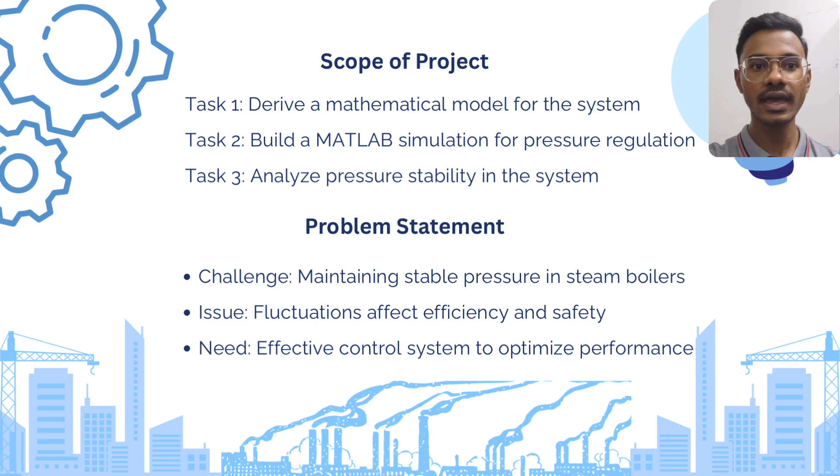Today, I would like to talk about the literature review. Introduction. Industrial process control refers to the management and regulation of equipment, systems, and operations to maintain desired output levels while ensuring consistent quality, safety, and efficiency. It plays a critical role across a wide range of industries, including paper manufacturing, food production, energy, biotechnology, chemical processing, pharmaceuticals, water and wastewater treatment, oil and gas, as well as the beverage industry.

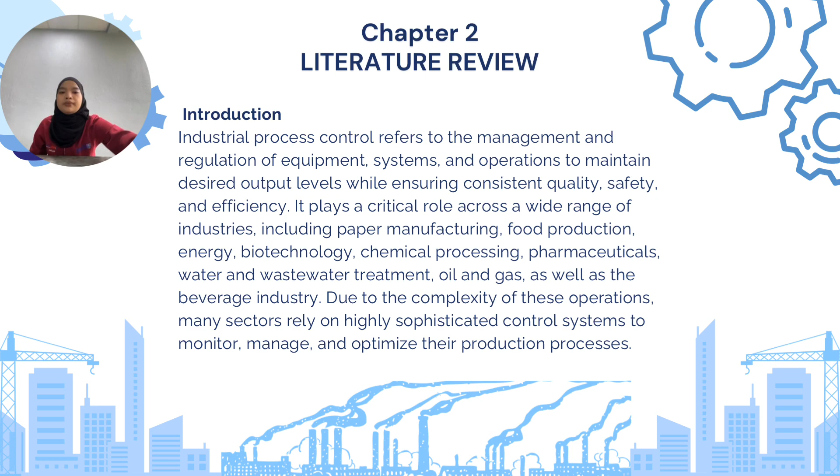Due to the complexity of these operations, many sectors rely on highly sophisticated control systems to monitor, manage, and optimize their production process. Next are the components of an industrial process control system. First, controllers. A PID controller adjusts the signal based on error. PLCs are rugged industrial computers for automation. DCS distributes control across plant subsystems. Two, actuators. Valves control the flow of liquid and gas. Motors and drives control torque, speed, and position.

Sensors and transmitters: temperature, RTDs, thermocouples; pressure, manometers, transducers; flow meters; level, ultrasonic, radar, capacitive. Human machine interface, HMI: real-time data, system status, and alerts for operators.

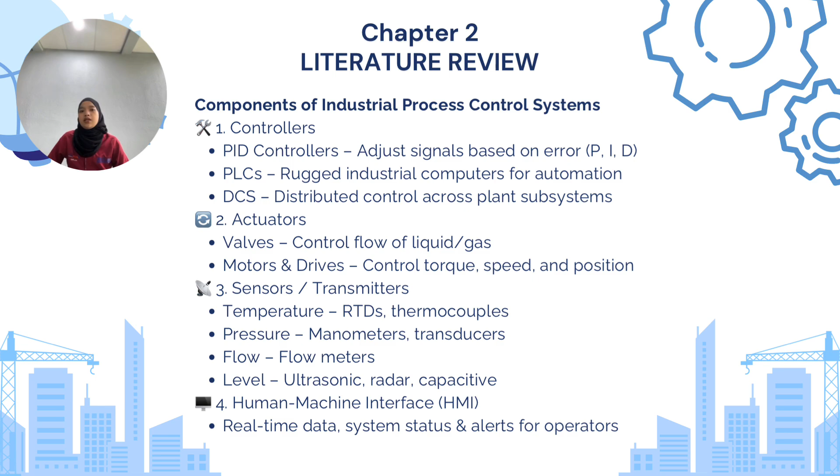Consistency and quality: maintains key variables, uniform product quality, critical in food and pharma. Safety: prevents overheating, overpressure and hazards. 3. Efficiency and cost saving: less waste, better energy use, lower cost. 4. Regulatory compliance: meets standards for safety and environment. 5. Scalability and flexibility: easy upgrades to production lines, real-time monitoring and data analytics, supports predictive maintenance and early fault detection. Thank you.

And then for the Nyquist diagram with PID, we get the shape of the Nyquist diagram with PID. So the shape is like a heart. This is some of our examples using MATLAB.

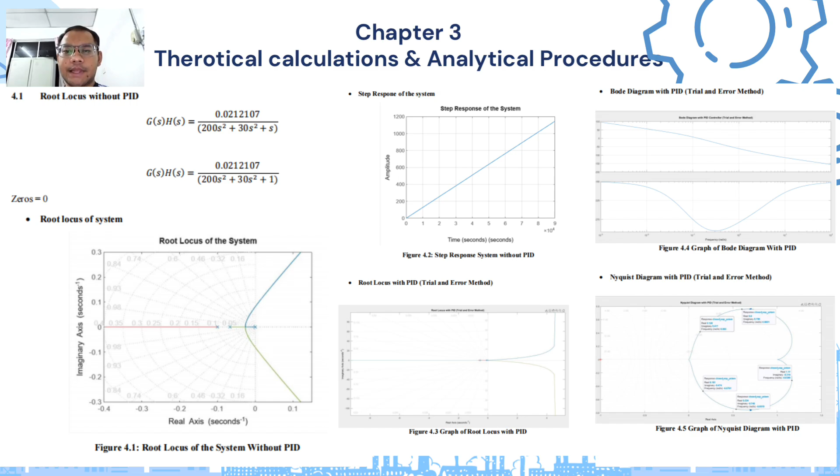Next, the second figure shows the step response without PID, with PID, and some of the trial and error methods that we used in MATLAB. For figure 4.6, step response with PID, you can see that there is a very up and down curve, and then for 4.7, step response without PID, the graph is slightly straight from the bottom to the top. And then for figure 4.8, step response with P, there is a curve from the bottom to the top.

And then for figure 4.9, you can see from the start it is a straight line. Then at the end of the graph, we can see a big trend from up to down. And then for figure 4.10, step response with PD, we get a graph similar to 4.8, which is the curve from the bottom to the top.

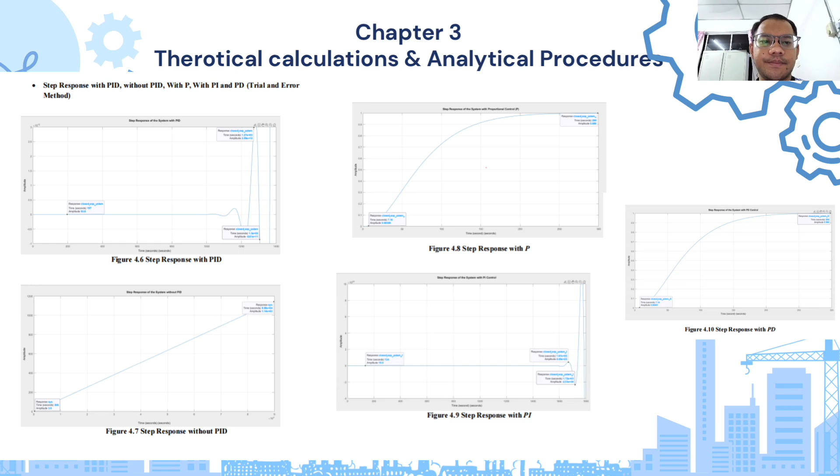So based on the theoretical and analytical procedure, we can make a discussion for our topic: this study shows how control strategy affects system performance. Without a PID controller, the system is slow and unresponsive. The rise time is around 3200 seconds and the settling time is 5800 seconds. This is too slow for most applications.

Compared to the open loop system, a PID controller significantly improved performance. Rise time dropped to 6.5 seconds and settling time to 48.2 seconds. The controller balances speed and stability. There is some overshoot, which is 18.7%, but the overall system performance is much better. Individual controllers P, PI, and PD have different advantages and disadvantages. The proportional controller is faster, with a 3.0 second rise time, but has an 88% overshoot.

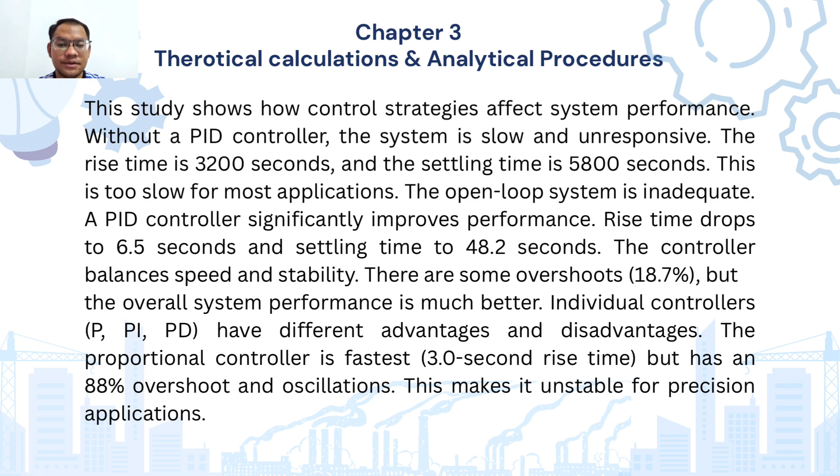In Chapter 4, we first tested the steam boiler system without a PID controller, and the results showed that the system was very slow and inefficient. The rise time was 3200 seconds and the settling time was 5800 seconds, which is far too long for any real world application. After applying the PID controller, the system performance improved drastically. The rise time reduced to just 6.5 seconds and the settling time dropped to 48.2 seconds with only a small overshoot of 18.7%. The system became much faster, more accurate, and more stable.

We also compared it to P, PI, and PD controllers. The P controller was the fastest, with a rise time of 3 seconds, but had a very high overshoot of 88%, causing instability. PI and PD gave better results but still couldn't match the balance achieved by the full PID controller. To support our findings, we used root locus, Bode and Nyquist plots, which confirm that the PID controller stabilized the system and enhanced its overall performance. In conclusion, the PID controller gave the best balance between speed, accuracy, and stability, making it the most effective control method for the steam boiler system.

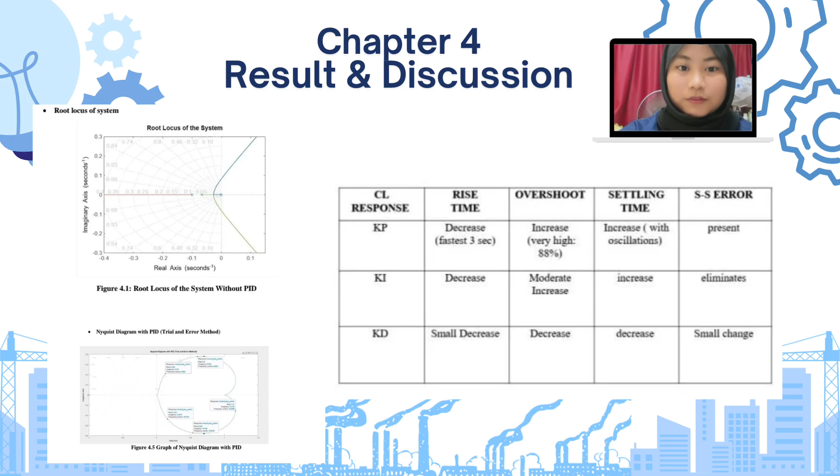I will present Chapter 5, Conclusion and Recommendation. This research successfully demonstrates that a PID controller offers precise and stable pressure control compared to P and PD strategies. Time and frequency response analysis show that the PID controller achieves faster settling, minimal overshoot, and reduced steady-state error. Root locus, Bode and Nyquist plots confirm system stability under varying conditions.

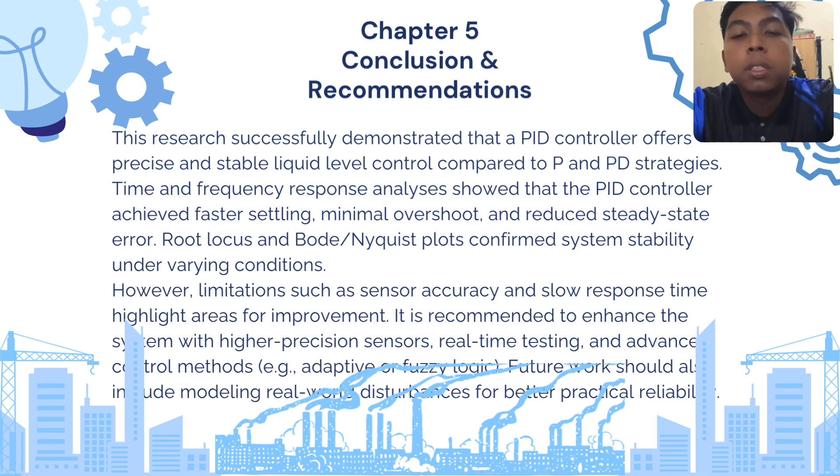However, limitations such as sensor accuracy and slow response time highlight areas for improvement. It is recommended to enhance the system with higher precision sensors, real-time testing, and advanced control methods, for example, adaptive or fuzzy logic. Future work also includes modeling real-world disturbances for better practical reliability.